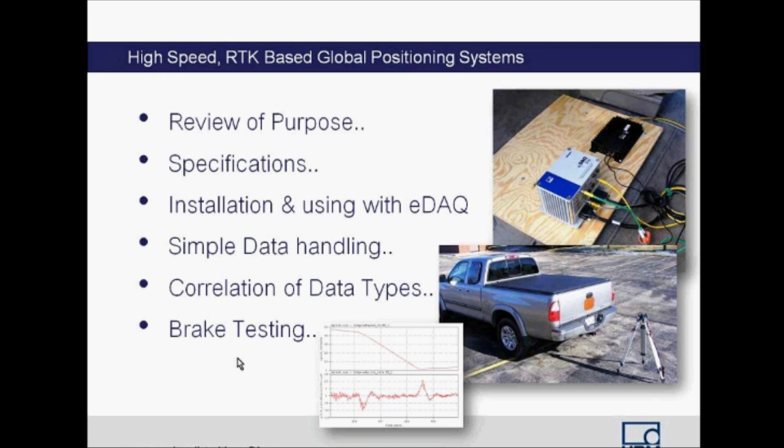So the pictures that you can see on the screen here, we have one that's a mounted system on a plate that was actually inside a Honda Odyssey owned by one of our engineers, Brian Lovedoll, and then here we see Dennis Dittmer's truck that we were using for checking the accuracy level using a Bosch radar, and you can see the plate here for the investigation of the accuracy of the speed, such like. So we've gone to great lengths to make sure that this is appropriate for what we're really hoping you'll use it for.

Just a quick look at some of the historical kind of lead up to this, and obviously the most important thing was when we went out and tested, we had a pretty good idea where we were, but we oftentimes didn't know exactly where we were, and this is very important, particularly when you're doing different surfaces. Whilst we can say, yes, we were on this rumble strip, we were on that offset sign, it's sometimes much more beneficial to know exactly whereabouts you were on it, and if you'd crept off of it to some degree.

So knowing where you are, having a good idea which one of those two makes sense, well, you can see the early iterations of some of the situational awareness systems, if you will, that were used in some of the earlier testing. Keeping a log was one thing that people did, and of course keeping a log isn't a bad idea if that's all you've got.

The most practical solution is having information recorded automatically so you don't have that interruption. You could set this system up to record data given a proximity location. Integrated solutions are always easier and generally better to use, while external systems can become cumbersome, complicated, and difficult to use.

The problem with measurements is they happen anywhere, anytime, almost any place. Having the ability to do this fairly quickly and easily is something that won't encroach on the testing sequence, and this has become recognized as a leading rapid deployment GPS solution.

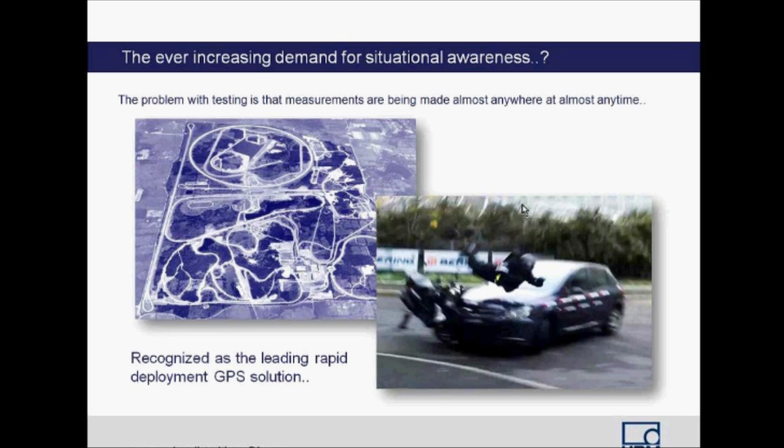I'm sure the rider wouldn't like them on the helmet, but if anybody has some suggestions, perhaps you could make them at the end.

The challenges of data and correlation of data - the challenge of correlating data isn't just knowing what was happening, but knowing where it happened. So having some information about a positional reference, as this example here shows, this is actually from the Swiss military testing area.

This is a section of data that correlates to a particular point within that series, which can be clearly seen on the GPS overlaid map, and here would be the dynamic data associated with that particular event. So GPS information goes a long way to answering these questions.

Sometimes more is needed, and that's really where the RTK component comes into play.

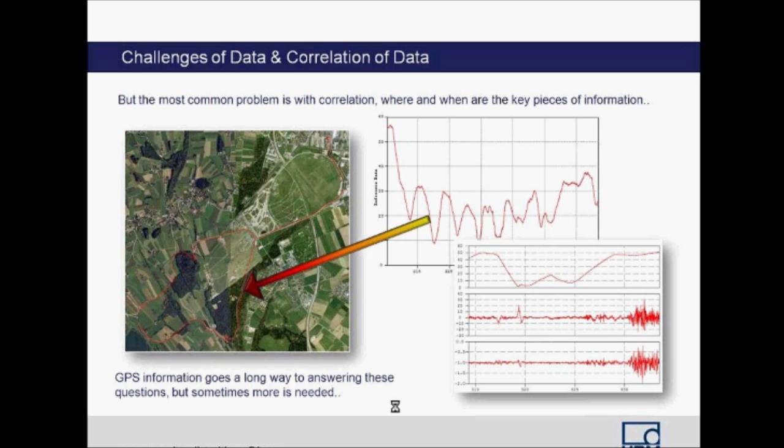Inertial measurements are all about knowing the behavior of the vehicle dynamically - knowing whether the vehicle is in a pitch, or if the vehicle is in a roll, or if there is even a yaw component to the action of the vehicle. Knowing this information is very critical.

As the mass moves around, you need to know how it's behaving on unsprung and sprung mass locations, and this is the perfect way to get that from the point of view of a positional reference within the vehicle. This particular device, the EGPS200, is a very efficient and quick way of getting this kind of information with a very high degree of accuracy.

Not only is the GPS data particularly useful, but also knowing that dynamic component is incredibly useful, especially when you're doing performance or brake testing. This is the most critical component - actually understanding the behavior of the vehicle and those mass moments as the different track events occur.

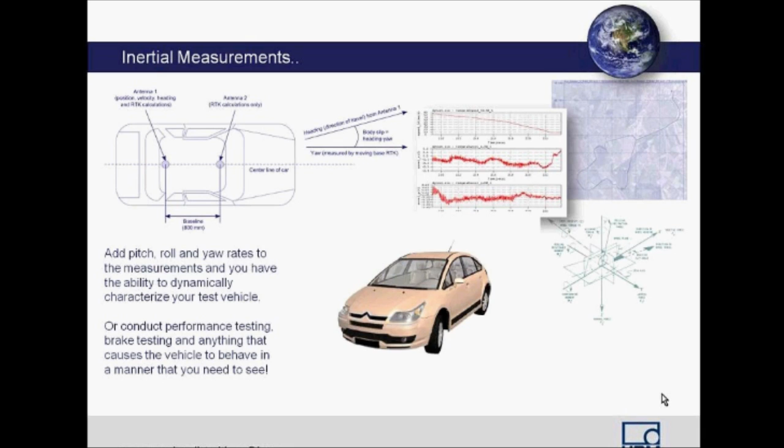As you can see, the system is fairly compact. It's very small - only 135 millimeters in width, 40 millimeters in depth, and 215 millimeters in length, and it weighs less than 1.5 kilograms, which is about 3 pounds. So it's actually quite lightweight, very compact, but as you can see, very rugged, as per our normal philosophy of built to last design.

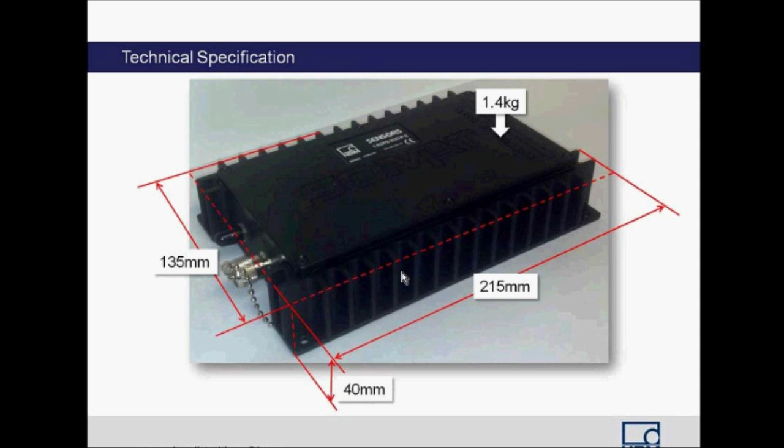This one is part of the family.

Specification-wise, there are two significant types to the eGPS range: the EGPS200 and the EGPS200 Plus. The only real differentiator between the two is the antenna plugs. With the EGPS200 Plus, you have the secondary antenna, which gives you a differential for your GPS signal as well.

So specification-wise, you've already seen the dimensions and the weight. The operating range fits very nicely into our traditional range of operating temperatures. Power is provided directly from the eDAQ - there is no requirement to provide power to this unit from any other external source. It comes directly from the ECOM and the ELCOM layer, as you'll see very shortly.

As you can see, the accuracies are undeniably very good for a GPS-based RTK system. We'll go through this a little bit later on in more detail, just to explain some of the components described here.

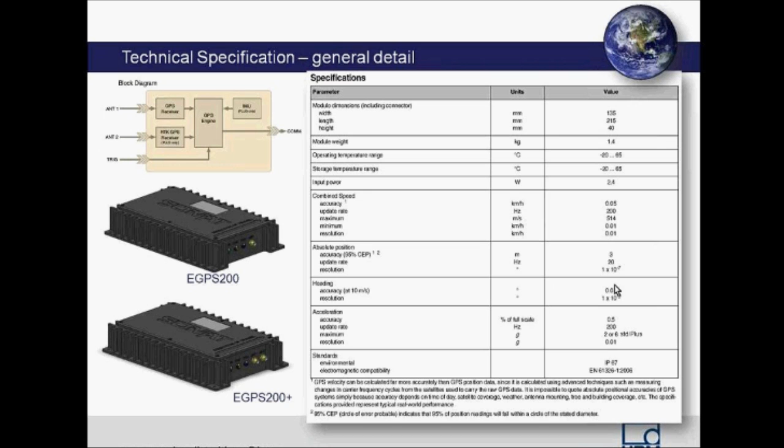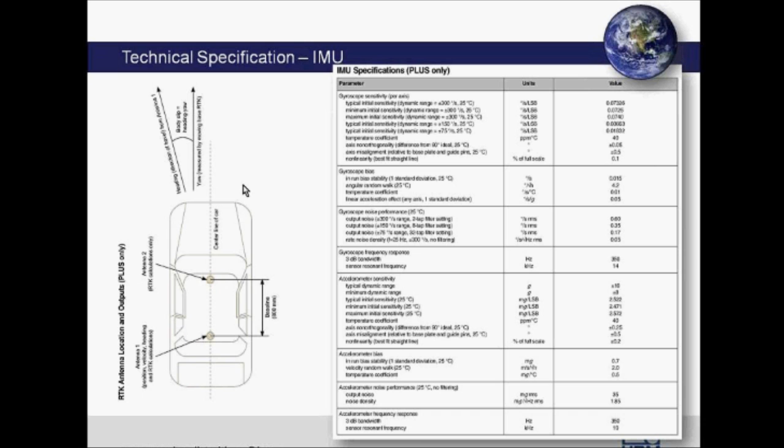This illustration here alludes to some of the requirements that are needed in order to successfully use this device. This is just the base footprint of it, just to reiterate the shape and size and dimensions. And you'll see that these are the base channels in the system.

You have a trigger channel, obviously your standard GPS channels, as well as a 200 Hertz 3D speed, a 20 Hertz 2D, and a 20 Hertz 3D. Heading, very accurate heading measurement, as you'll see in a moment. Gradient, so you actually know the component for the pitch, the accelerations, and then of course the standard GPS components.

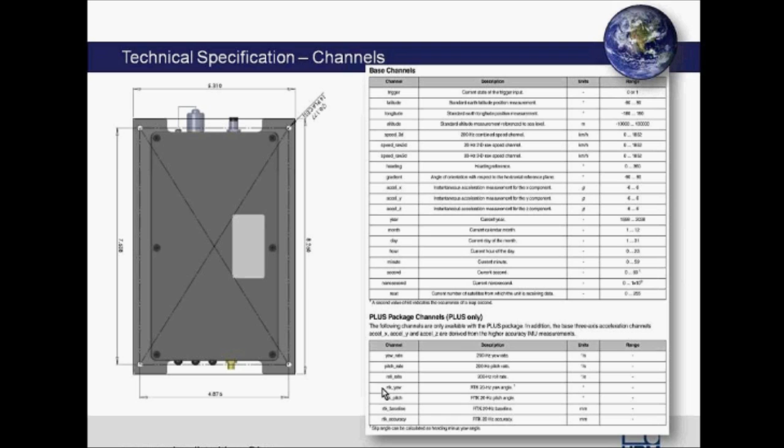On the Plus package that includes the dual antennas, you now have yaw, pitch and roll rates at 200 Hertz. These are derived to some degree from the acceleration measurements. And then you also have the RTK yaw as well as pitch and a baseline and accuracy for the RTK component as well.

So just to summarize the accuracy component of this, as with all satellite GPS systems, the maximum number of visible satellites covers approximately 180 degrees in the horizontal plane, but only 90 degrees in the vertical plane. As you can see here, there will always be a much, much more accurate reference for the horizontal measurement than in the vertical measurement, so altitude is always problematic.

And it does not require a base station. It doesn't use the base station. Now, some of the implications of this, of course, when you are static, that you get a limited amount of stationary noise, which means you get a little bit of creep around, if you will, of the signal. So, as you can see here, the speed here in meters per second, you've got all of the trigger thresholds that would be required for doing things like brake testing and performance testing. There isn't a problem with this.

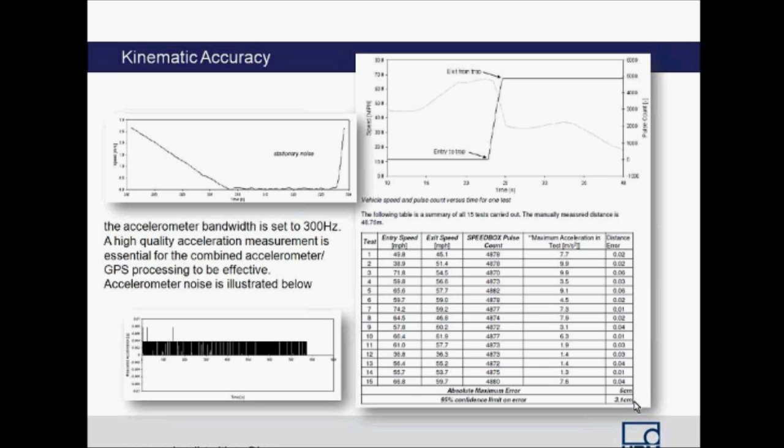When we look at the acceleration and the noise level of the acceleration, you can see, to coin a very popular phrase, it's in the weeds. And when we do comparisons of the vehicle speed versus accuracy of count position for triggers, as you can see, typically we get extremely accurate measurements. By the specification for the brake requirements for both the federal requirements as well as international requirements, these are well within the boundaries of the acceptable ranges.

So how do we get this to the eDAQ? Well, the eDAQ, all it needs is we need a COM layer, and the COM layer needs to have the GPS port on it, obviously. It's very important to note that the eGPS200 does not work on the DIO layer. So don't go trying to plug this into the GPS on the DIO layer. It only fits onto the COM layer.

This is the ELCOM, this is the ECOM layer. And there's the GPS input on the ECOM layer with the 3 cans and the VBM. Here's the 3 cans and the VBM. Sorry, these are the 3 cans, this is the VBM. You don't need any special software, no special adapters. That comes with the cable that you need to plug to the eDAQ. The eDAQ provides all the power that it needs to the eGPS200. It's all there. So one cable, Turck to Turck, connects the 2 devices together.

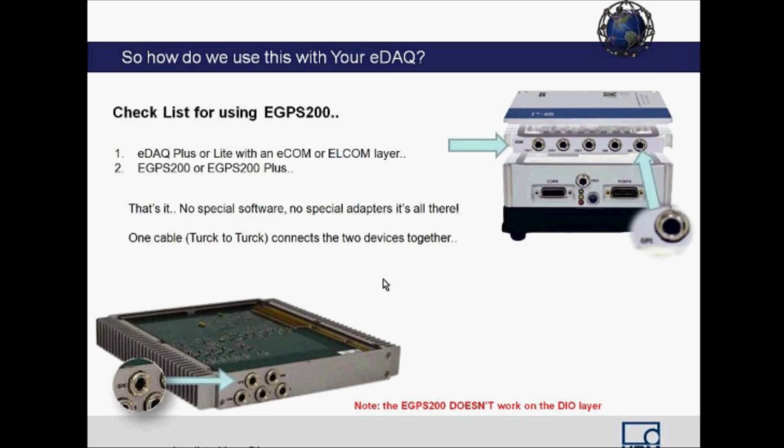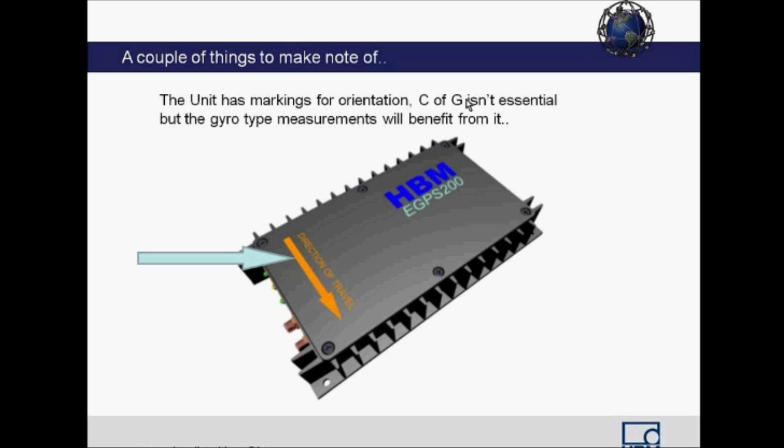What could be easier? So a couple of things to make note of. The unit has markings for orientation. You'll see this very clearly on the unit that there is a direction of travel pointer on here. Whilst trying to get close to the center of gravity is obviously of great benefit, it isn't absolutely essential, but the gyro measurements will clearly be a lot more accurate in reference to center of gravity if it's close to the center of gravity.

Then we need to attach 2 antennas. These are the differential antennas. So we're looking at the eGPS200 Plus here, and they need to be set 800 millimeters apart, and there is a nice guide provided.

Once these are set 800 millimeters apart, with the cable direction correct and the orientation of the GPS receivers correct, we're ready to move to the next step. GPS antenna number 1 is trailing as far as direction is concerned. GPS number 2 is leading, and the cables face the direction of travel.

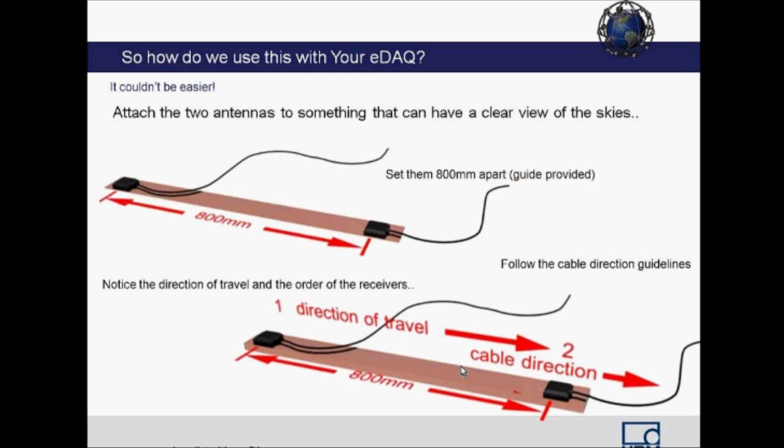Once you've got these set up, they could be mounted on anything, you could use magnetic mounts, or an adhesive, keeping in mind that if you put this into a thermally subjected, high temperature area, the adhesive may fail. So you don't want to take any chances, and try to avoid areas where that might happen.

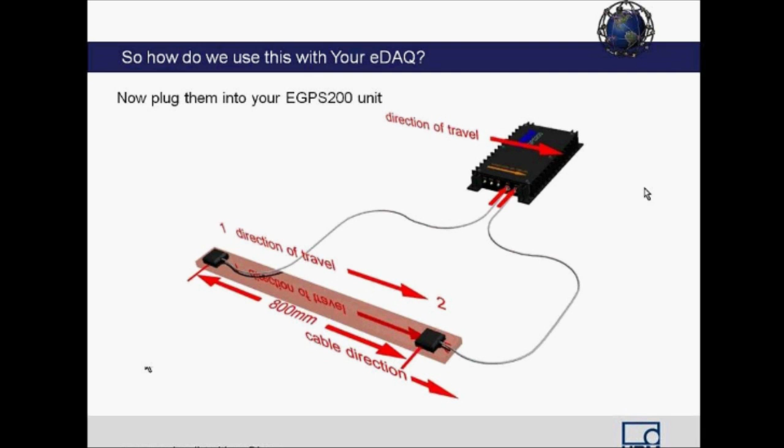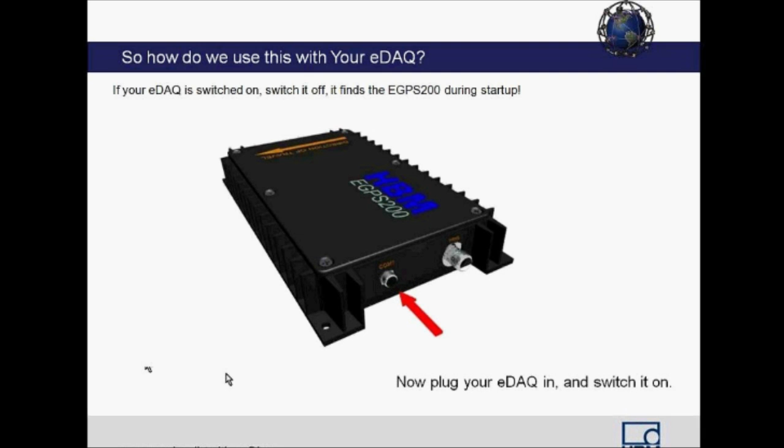Once you've done that, it's a good idea to make sure the eDAQ is switched off, although you can cycle power afterwards, but plug it into your eDAQ. Plug it in via COM1 on the back of the eGPS200, and then into the GPS port on your COM layer. Power your eDAQ up, and you should get a power LED illuminate on the front of the eGPS200.

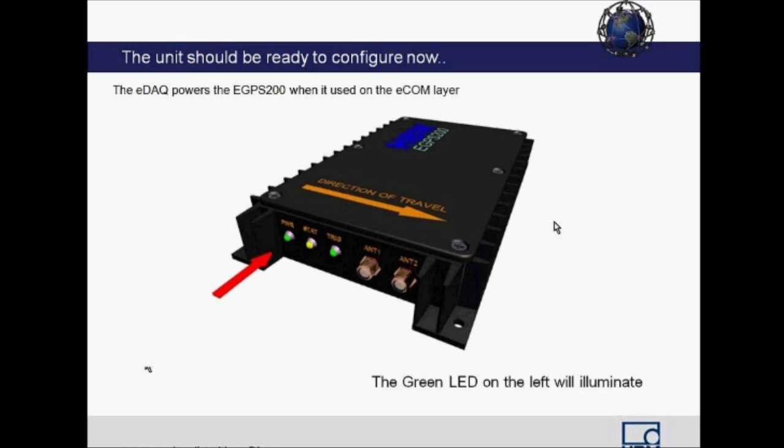If the power LED doesn't illuminate, check the cable - that's the highest probability of the problem. Second possibility is you haven't got enough power into the eDAQ itself, so it can't provide enough power through to the eGPS200. So, green LED is on.

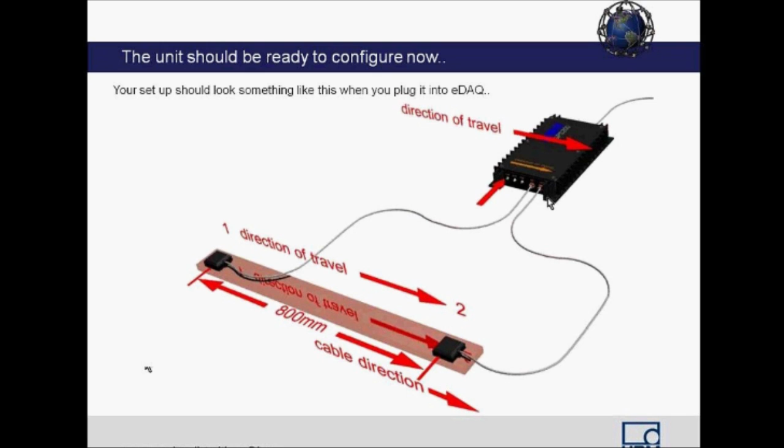This is your layout thus far. We've got the two antennas attached, number 1 and number 2, the power into the eDAQ, and now we have a green LED on to indicate that we're all powered up and ready to go.

This isn't a very eloquent solution, it doesn't look very eloquent, but it functionally works. This is done with some Velcro. It would be much better, if you want very accurate measurements, to mount this very securely onto the frame of the vehicle or onto a point where you know you've got direct contact with the sprung component of the vehicle. So make sure it's in the correct orientation, the direction of travel.

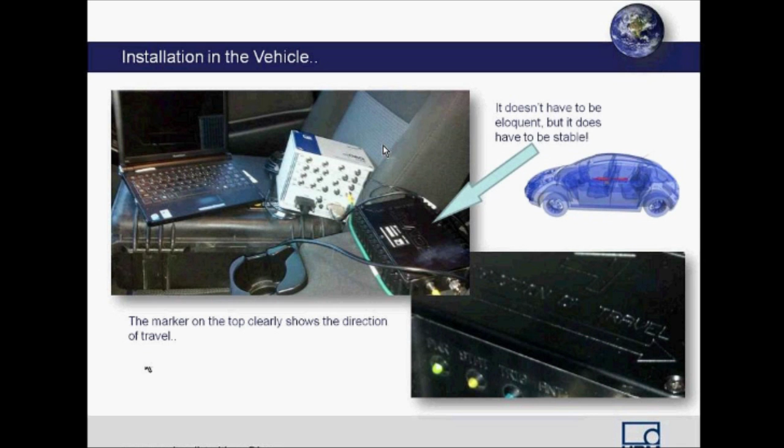This is the arrow at the back here, you can see it zoomed in on here. Direction of travel, indicating that it needs to point that way for the front of the vehicle, and as you can see by the seat here, the front of the vehicle is indeed that way.

The antennas are already mounted 800 millimeters apart. In this example, I just put them on a piece of wood, glued them down, and then screwed and clipped the wood to the rail on the back of my pickup truck, and ran the cables through the sliding window in the back. I used the guide that comes with the system to lay out the two antennas exactly 800 millimeters apart, then mounted this onto the rail and ran the cables through the back window.

Connected them in, and once I plugged in the power to the eDAQ, I'm looking for the stat LED, which tells me whether or not I've got signals from satellites, the status of the system. But keep in mind that as with all GPS systems, the eGPS200 may take a few moments to acquire the satellites that are in its line of sight.

And of course that also depends heavily on the quality of sky view and the relative location. If you're in a location where a building is potentially blocking some of the view, it's probably worth moving. The yellow LED will actually illuminate, possibly blink, to indicate that you have acquired satellites.

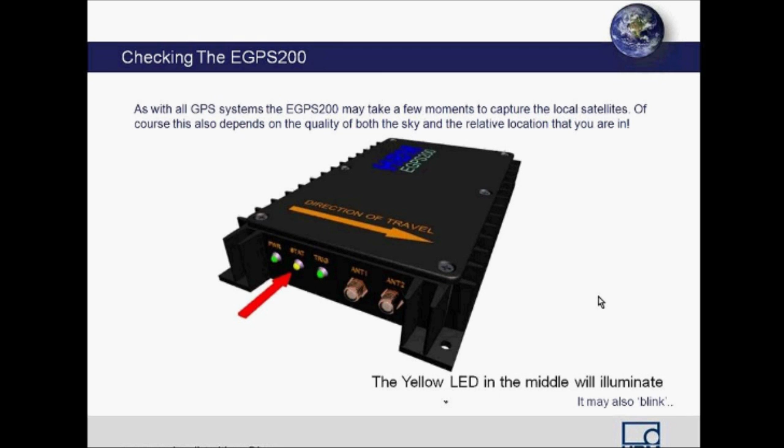Now to actually look at them, we can do that fairly easily in TCE. It's a good idea, if you don't get the LED coming on, to just check the location of the two antennas. Remember that one is trailing, so this would be 1, this would be 2, and with the strip, the little guide, it's actually magnetic, so you can put it over the radius of the roof without any problems.

This is an excellent location because it's the highest point on the vehicle. It's not subjected to any thermal effects from the engine—I'm not suggesting that would damage them, but the heat of the hood may cause adhesives to fail. So keep in mind this is probably the best location anyway: the highest point on the vehicle, better line of sight.

So make sure you're in a good location, give it a few moments, and the yellow LED should come on. Moving into the software side of things, because it's designed specifically for the eDAQ Plus and Lite systems, it is a true plug-and-play system. All you have to do is query your hardware the same way as you would for any other configuration you're doing.

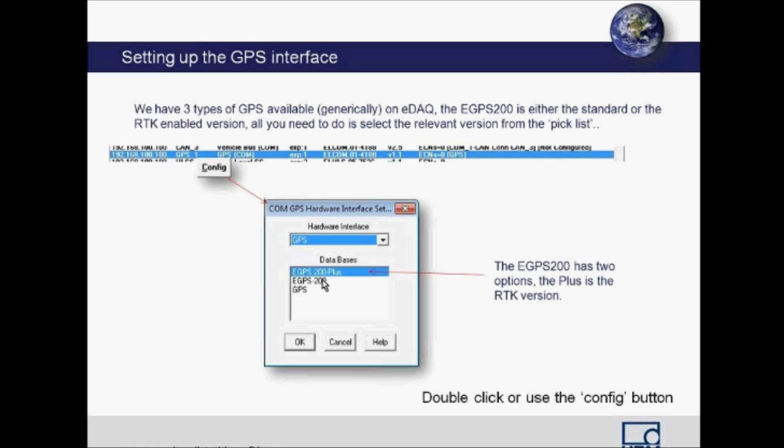Once you've queried the hardware using the query button, you simply configure the GPS to use whichever one you have. In this example, it's the Plus unit. By double-clicking on the entry in the list of hardware, or clicking the config button, I can bring up the dialog that allows me to select the relevant GPS system. This is the RTK Plus unit, this is the standard 200, the eGPS200, and this would be the 5 or 1 Hertz GPS using the NMEA standards. In this case, it was the Plus—double-click or config button, select this, OK—and now it's just a matter of adding the transducers in.

These are already predefined by that selection. So looking in the transducer list, we select the GPS from the COM layer, and then we get presented with all of the channels available for that particular interface. In the case of the Plus, we have all of the pitch, roll rates, as well as the yaw rate—a bit more than the standard 200, which gives much more accurate measurements for things like brake testing and performance testing.

But selecting the channels is very simple. You could highlight all of them if you want. Some are less meaningful than others, but you select them, add them to the list, and by nature of the design of this interface, you should always remember—while still selected in the list—to edit them and modify the query and sample rates so they're set to the desired rate. In this case, we can go all the way to 200.

Some of the channels, the GPS channels, are in reality only 20 Hertz, but all of the RTK components are 200 Hertz. And if anybody tells you that a GPS system uses more than 20 Hertz, there's a high probability that they don't know what they're talking about.

All channels can be checked by using the DVM or the scope, so you can just check to see if they're working okay. Of course, using the digital reader is a little bit easier. And just remember that you may have changed it to 200 Hertz.

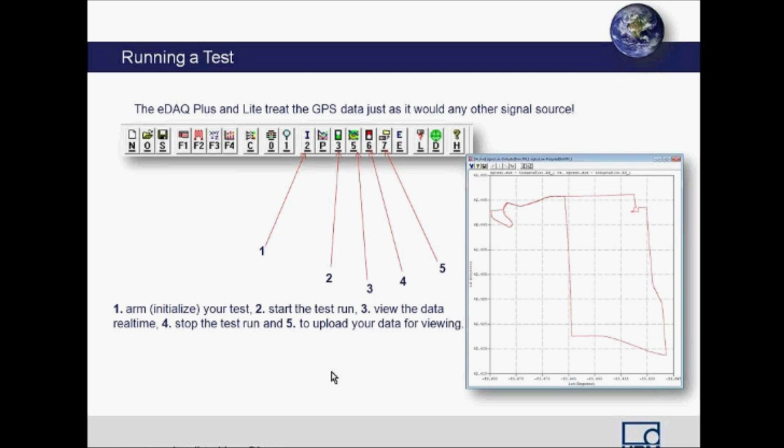This example here is some data that I recorded on that same installation of that vehicle. Literally within 10 minutes of installing this, I was looking at data. Luckily no police officer saw it, so I shouldn't get a speeding ticket. But here's how simple viewing and handling data is with the infield software.

Remember that the infield viewer is free of charge. You simply load up the channels into the channels list, and in the viewer option you can just copy and paste it directly into Excel, or in the full versions you can actually save it in ASCII file format, in DeLorme, Microsoft Streets and Trips, verbose ASCII, and so on.

If you wanted to put it into something like Google Earth, this would be the first stage towards putting it into a KML format, which is the standard Google Earth format. There are a number of websites that have the facility for you to simply download this data as a textual data set, and it will produce the KML file for you, so you don't even need any fancy software to do this.

This is just to demonstrate how quick and easy it is to provide or produce reports to show people. So just a couple of quick steps.

Here I've used the export active plot in infield, in the plot window, to export it as a meta file. I've saved it as a meta file and specified some dimensions for it. This is actually that very meta file exported and put into Microsoft PowerPoint.

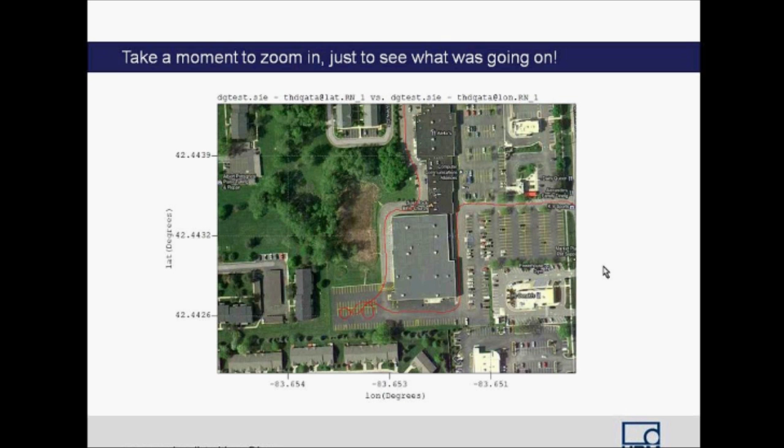Some people may have noticed that some of these were jumping around a little bit at the start, and you'll also notice they jump around a little bit when it goes static. That's because in view of the weather condition, and also the fact that it hadn't acquired the exact position, it got a little random at times.

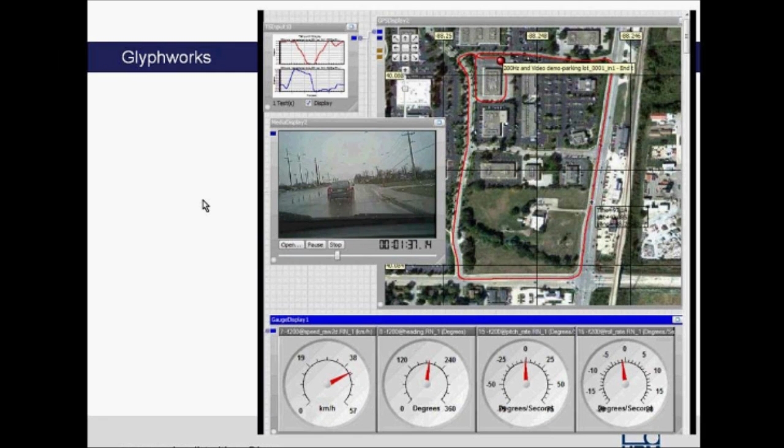But you can clearly see here that correlating the data between both GPS, video, and other signals with eDAQ is very, very simple and straightforward. And GlyphWorks is an excellent tool to use for the purposes of replaying and reporting.

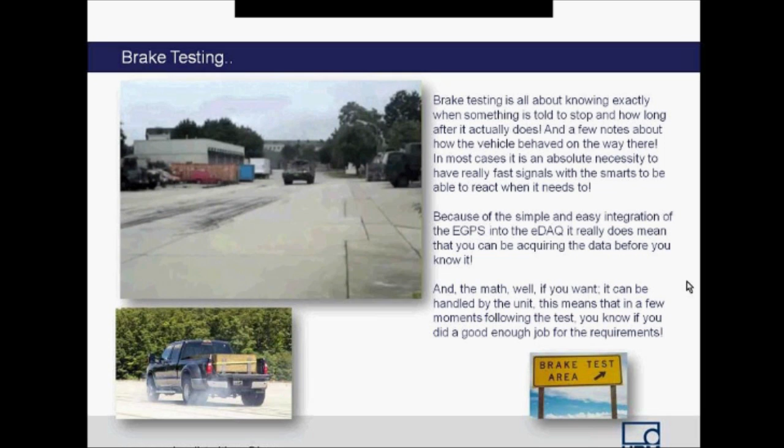This is just a quick look into the brake testing aspect of the applications you could use this for. The image there was of a military vehicle, a personnel carrier that was used for a brake testing test that was done in Switzerland.

Of course the important thing is knowing exactly when something was instructed to stop via a pedal or whatever else, and how long it took to actually do that stop. And of course that's not the end of it, because there is other information that's necessary.

We need to know the inertial component for this. We need to know what the yaw component on the vehicle was and how that affected the handling of the vehicle in the event, and how the mass was distributed as a result of any deviation from a straight line. So these are all the pieces of information that you can extract directly from your eGPS200.

And because it's so easy to integrate with the eDAQ, it means you could be acquiring data using this for brake testing in fairly short order.

If you prefer to do the calculations for your brake testing almost on the fly - and I say on the fly, they are actually on the fly, but you have to review them at the end of it - then you could even do that, because the eDAQ is more than capable of running all the computations necessary in order to get rid of those derivations.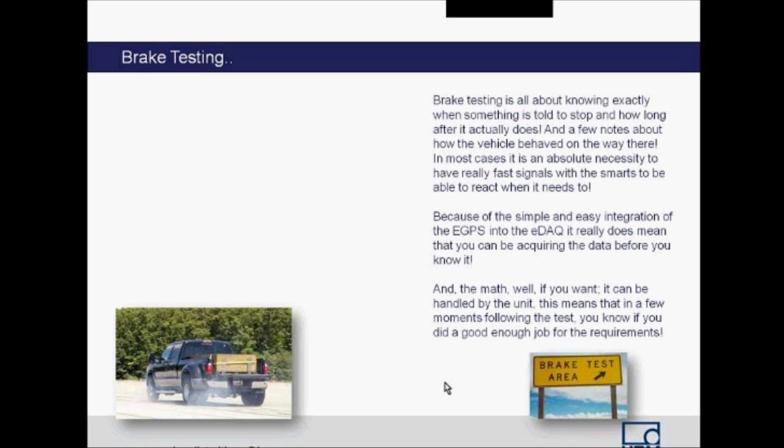If we move on a little bit here, this is an example of a brake testing configuration, and these are just the computed channels. You'll see here that the computed channels need things like trigger components, speed components, pressure components for certain aspects of the operation of things like levers and pedals.

Also other markers, perhaps if there's an ABS sensor and so on and so forth. And then the all-important integration for getting distances and so on.

So you can see here that the speed monitoring method is triggered from a trigger. It could be triggered from a trigger at both ends. The trigger goes into the same end of the panel on the eGPS as the eDAQ connects. It's just a BNC type connection.

And you could use the trigger to either initiate the event or even control the event complete. Or you could use speed components as well, which could be based on that GPS to a near zero, because it's almost impossible to guarantee an exact zero due to the wandering effect of GPS. But combine that with other factors such as ABS sensors and such like, and you can have a very, very accurate stopping point. And the eDAQ can do all of this processing in real time.

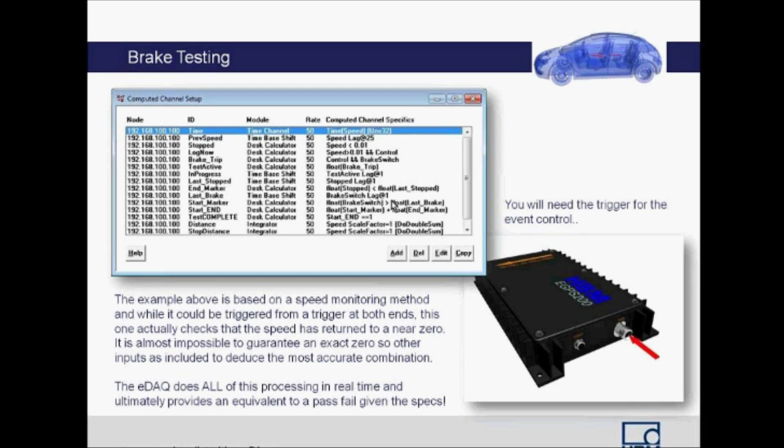In fact, some of these channels, as you'll see here, are actually phase delayed. The phase delay is so that we can actually look for that initial trigger moment, which is when the speed starts to decrease. The moment the speed starts to decrease is the trigger component, and then as soon as that occurs, that becomes a falling edge. Once there's a falling edge on this, that's the trigger.

Once we have the trigger, we can combine that with other triggers as well, such as comparing and making sure that the brake is being applied, either by the lever or by the pedal, depending on whether it's a motorcycle application or not.

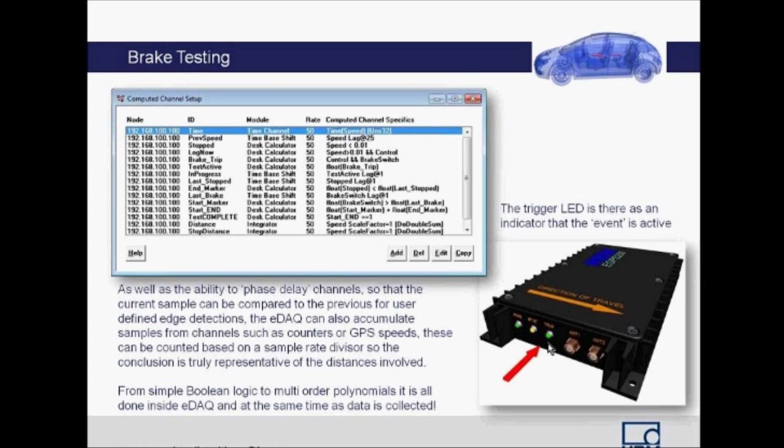Once that happens, we can say the test is active. And once the test is active, we can start integrating distances so that we know what the distance is, and we can start measuring these triggers to measure the speed dissipation over the length of the event, as well as the pitch component, so that we know what the inertial component was. So as far as eDAQ is concerned, from a simple Boolean to a multi-order polynomial, it can all be done inside the unit. The green LED on the end of the unit by the antennas is the indicator for the trigger condition to be true, if you want something to reference while actually doing the test.

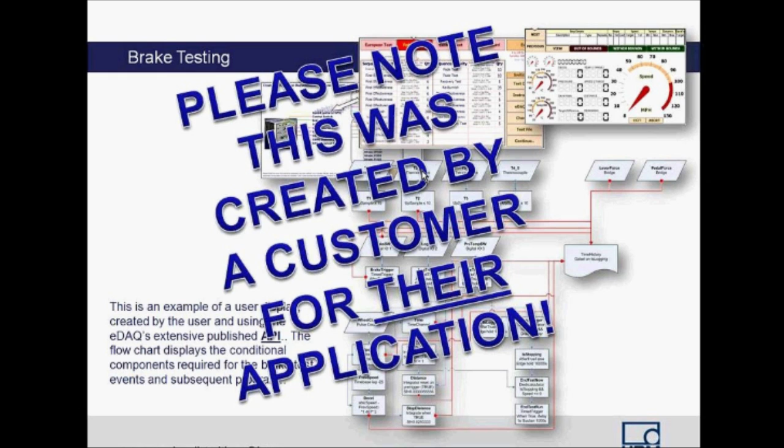This is an example that is very important—I mention that this was actually created by a customer for their application, not created by us. This is something a customer has done for themselves using the eDAQ API, and the eDAQ API can be used to generate custom or defined test routines. This is a flow chart of the components required to satisfy things like the federal testing requirements for first and third effectiveness and so on. This is all linked into the eventual control mechanism written into the eDAQ. This software still generates a TCE file in the background, and once the TCE file is on the system, it works in conjunction with this interface so the operator can see if they failed the test, if they're within the boundaries of the test, and if they've succeeded at completing the test, they get both. Again, I'd like to emphasize this was created by a customer, and we are just showing you what can be done.

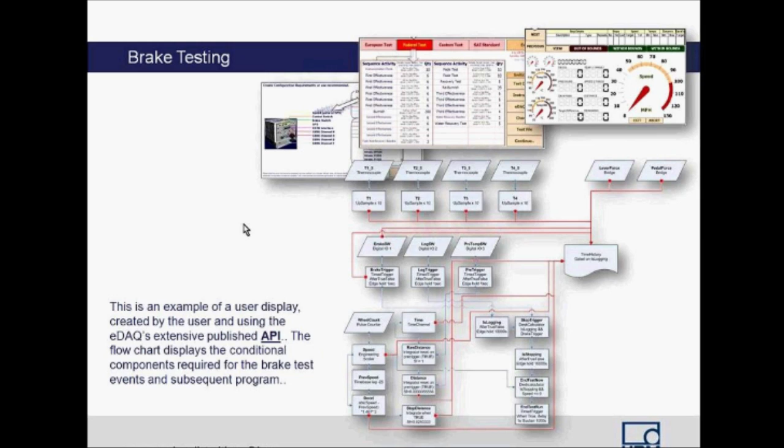I hope we covered a few things that are beneficial to people, and that you're interested in looking at more of the EGPS200. We can get our guys out there to demonstrate this to you at the earliest possible convenience. Thank you for your time.